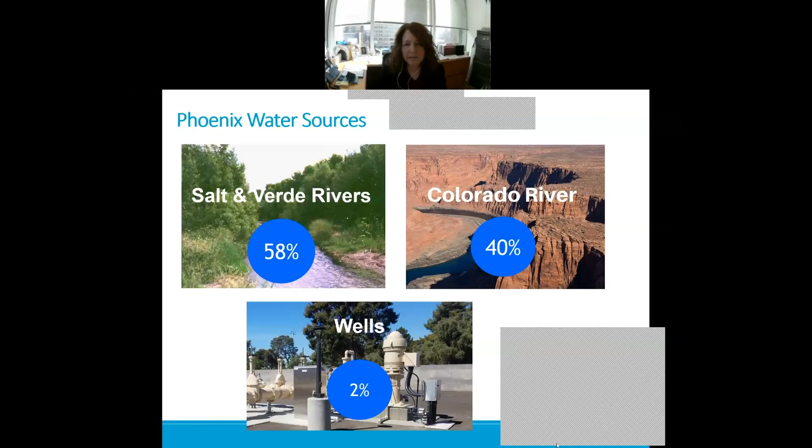I want to thank everyone for joining us today to hear about the Drought Pipeline Project. In order to understand the need for the project, I want to give you a little background on where Phoenix gets our water and how that water is moved to our customers. So as you can see on the slide, 98% of the water we deliver to our customers is surface water or from rivers, and only about 2% comes from groundwater pumped through wells.

So 58% is from the Salt and Verde River system, delivered to us through the Salt River Project Canal system at 3 of our water treatment plants. And then 40% is from the Colorado River system, delivered to us through the Central Arizona Project at 2 water treatment plants. Our dependency on surface water forces us to be constantly vigilant regarding climatic conditions and to be forward thinking about preparations for a hotter and drier future.

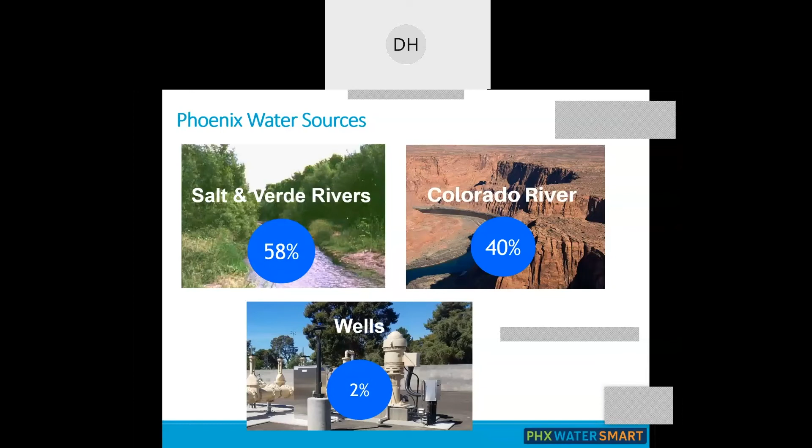Unfortunately, the Colorado River is over-allocated by approximately 1.2 million acre feet, which is roughly equal to 4 times the amount of water the entire city of Phoenix uses in a year. It's a large overallocation and a large problem. And to make matters worse, scientists tell us that the flows on the Colorado River may diminish as much as 25% in the future. Next slide.

So we are in a drought on the Colorado River system, and even though the watershed received snow this last winter, and we're seeing a little bit of snow now, we need many more winters like this one for water levels in Lakes Powell and Mead to recover.

And this is concerning because water levels in Lake Mead determine water allocation restrictions on the Colorado River system. So the Bureau of Reclamation, which runs the Colorado River system, sent their latest water level predictions recently based on current conditions. Their projections show that if we experience the same poor hydrology, rainfall and snowfall that we did in the early 2000s, Lake Mead water levels could fall below elevation 1025 by as early as 2024.

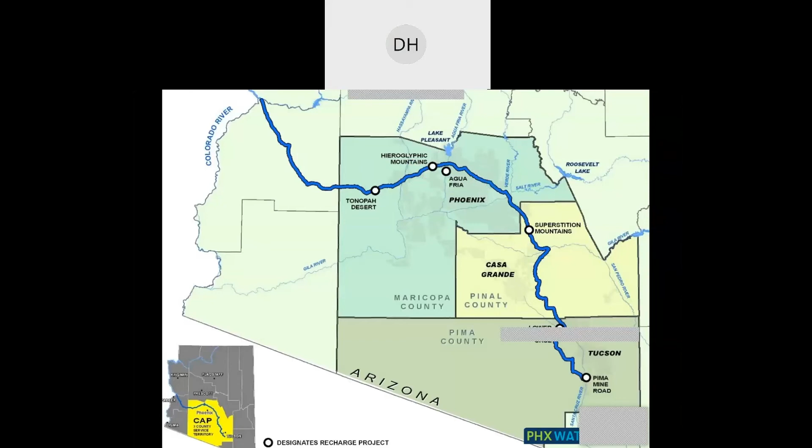Our ability to move water between the blue and green areas is very limited because of how our system was developed over time. We have supplies on the Salt and Verde rivers that are legally allowed to be used outside the boundary of SRP. And we have some surface water previously stored underground that we can use in case of restrictions on the Colorado River system. We also have native groundwater supplies available to use as a last resort.

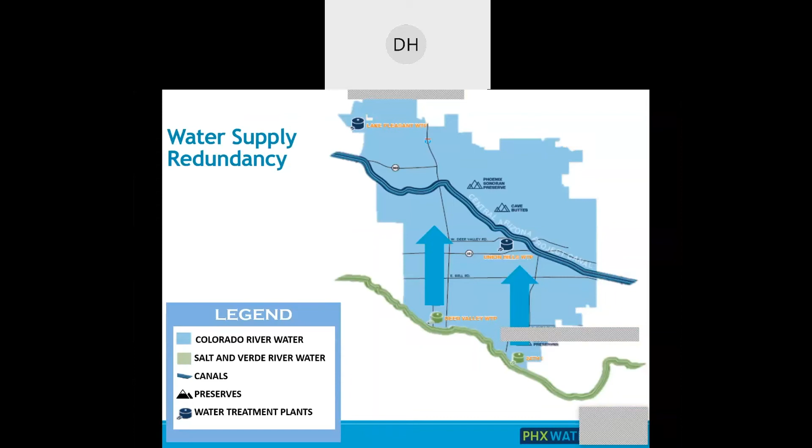So we have enough water supplies, but what we lack is the infrastructure to push the water where it needs to go during times of severe shortage on the Colorado River. With our existing distribution system, we can't push enough Salt and Verde supplies north to meet demand, and we cannot meet demands in North Phoenix on groundwater alone. This is because our water distribution system was designed and built to be dependent on a small number of large water sources coming from our 5 water treatment plants. Our pipeline is not designed to be dependent on a large number of small sources of water in the form of wells - it just doesn't work hydraulically.

So to reiterate, in order to serve our customers and build resiliency in our water system, Phoenix Water needs the infrastructure to move local water supplies north. These improvements are to provide water supply for our existing customers. As you can see through these pictures, this is basically all the areas you think of in North Phoenix right now to provide that water to our existing customers.

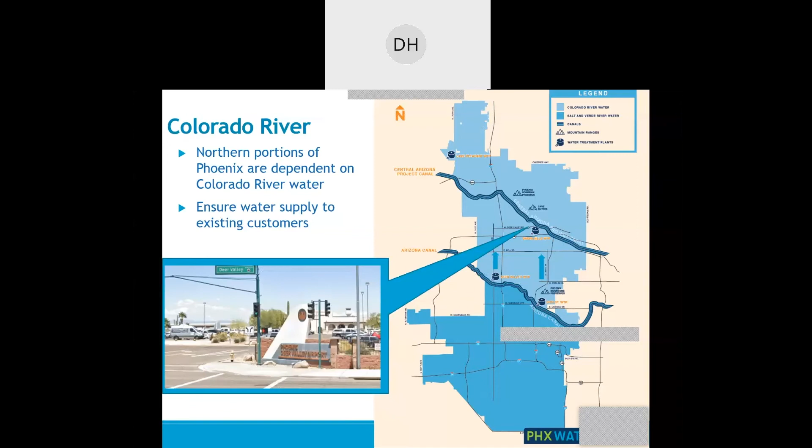And now I'll turn the presentation over to Clayton Freed, who will talk about the project in more detail. Thank you, Darlene. So the Drought Pipeline Program includes several projects to build new infrastructure to move water north and add overall resiliency to the Phoenix water system. This includes 12 miles of new pipeline to carry water between different parts of our system, as well as 4 new pump stations to push that water where it needs to go.

We're holding this meeting today specifically to discuss the projects mostly along the 32nd Street corridor, including a new pump station we're building at 31st Street just south of Bell Road, as well as the new 66-inch pipeline we're building through the Phoenix Mountains Preserve up to Bell Road and 32nd Street.

While we're on this slide, there was a question in the chat box confirming that the pipe from Glendale Avenue up to Bell Road is a new pipe. It will be a brand new 66-inch pipeline. As you can see on the map, there is an existing 48-inch pipeline also being replaced and rehabilitated, but this Drought Pipeline Project is mainly focused around the new 66-inch pipeline.

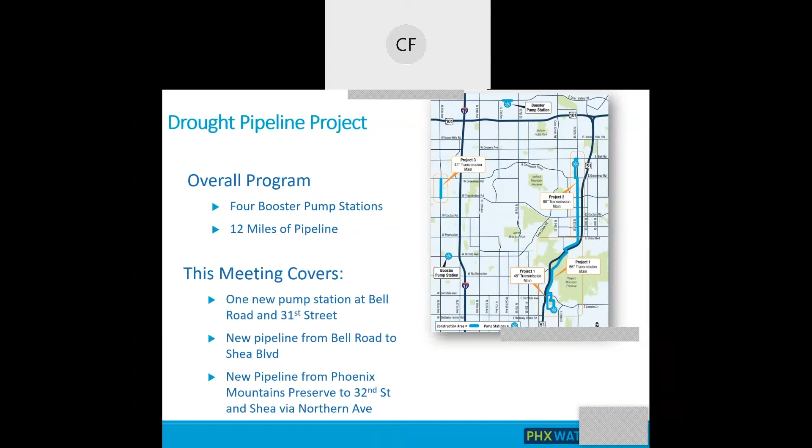If we could go to the next slide.

The new pump station I mentioned that's on 31st Street just south of Bell Road is shown in the image on the right. This pump station will be used to move water around in North Phoenix once the water is pumped up through the 66-inch pipeline. The image on the left is a 3D simulation based on our design of what this pump station will look like when complete. The entrance will be off 31st Street, and the pump station will include a perimeter block wall fence as well as new landscaping along the 31st Street frontage.

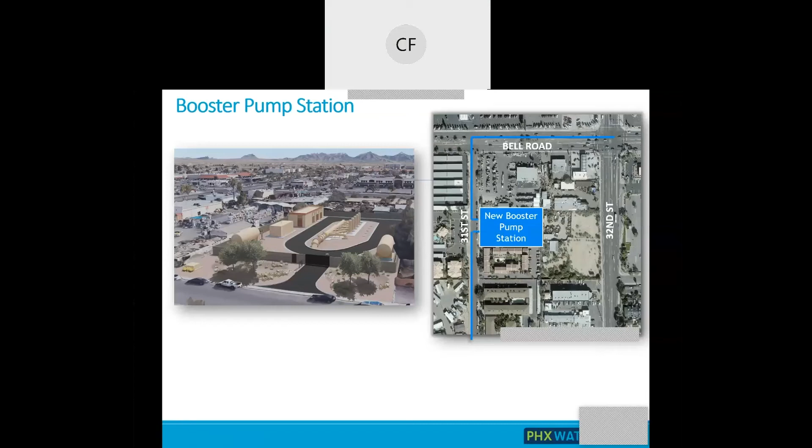These images help show the overall alignment of the 66-inch pipeline along the 32nd Street corridor. Looking from north to south, the pipeline will connect to our existing pipelines at 32nd Street and Bell Road, and will be installed along 31st Street between Bell Road and Greenway in order to connect to the new pump station on 31st Street. The pipeline will then go back to 32nd Street all the way from Greenway down to the south side of Shea. South of Shea, it will start to follow the Northern Avenue frontage road on the northwest side of SR 51 between 32nd Street and 26th Street.

Just east of 26th Street and Northern Avenue, we'll be boring a tunnel underneath SR 51 in order to connect with the 66-inch pipeline being installed through the Phoenix Mountains Preserve.

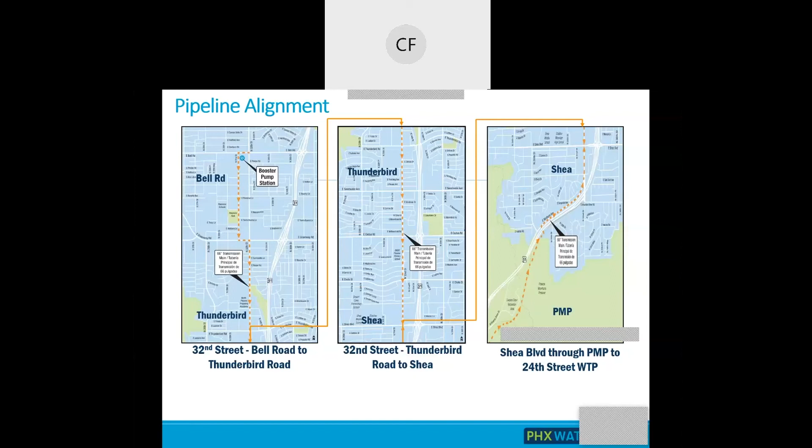It is typical for some utilities to have to be moved to make way for new pipelines being installed, and this is the case for the Drought Pipeline Project. Not only will the 66-inch pipeline be installed during the overall construction period, but other utilities will have construction activities in the area starting in the next few months and throughout the construction period, in order to move their facilities and make room for the 66-inch drought pipeline installation.

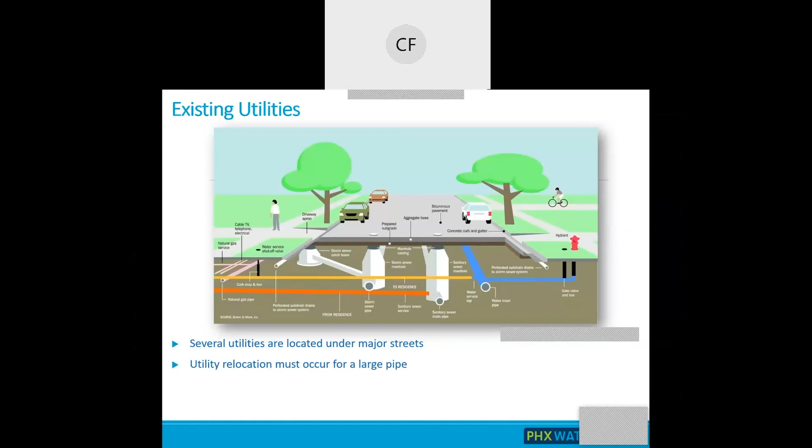It is a very complex process to take our large water mains out of service, because we have to ensure there's always water available to our customers. Oftentimes we do this during the winter months, starting around this time of year. So we will be installing the valve and connection to our existing pipeline at 32nd Street and Bell during a limited window when we can take that existing pipeline down.

Some of the construction at the 32nd Street and Bell intersection is actually going to start taking place soon, in November 2020 through January 2021, prior to the rest of the construction, which will start closer to April 2021, so we can make this critical connection to our existing pipeline during the winter months.

Multiple utility relocations will start taking place as well in various locations along the pipeline routes, and the 66-inch pipeline itself will start being installed in approximately April of 2021. It will be installed in multiple simultaneous construction headings in order to complete the pipeline installation by the end of '22, again in preparation for potential drought-related restrictions. The pipeline will generally be constructed from north to south, in those multiple headings.

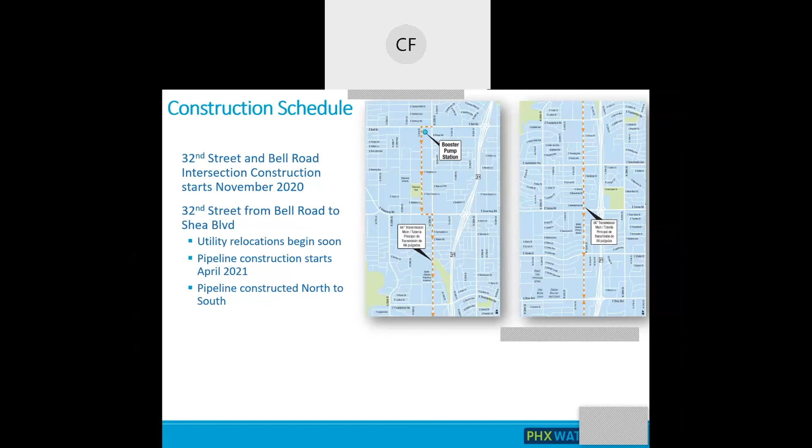So the pipeline work south of Shea and along the Northern Avenue frontage road will start around June 2021. Around the same time, the tunnel under SR 51 will start being installed. South of that, within the preserve, construction will start in spring 2021, as soon as March 21, and will follow mostly pre-disturbed areas, including the existing bike path in the Dreamy Draw area, which will be restored.

A new pedestrian path will be added at the end of construction, along with surface and landscape restoration. The work in the preserve will also take place at the same time as parks improvements to the Dreamy Draw recreation area, in order to minimize the overall duration of impacts to users of the recreation area.

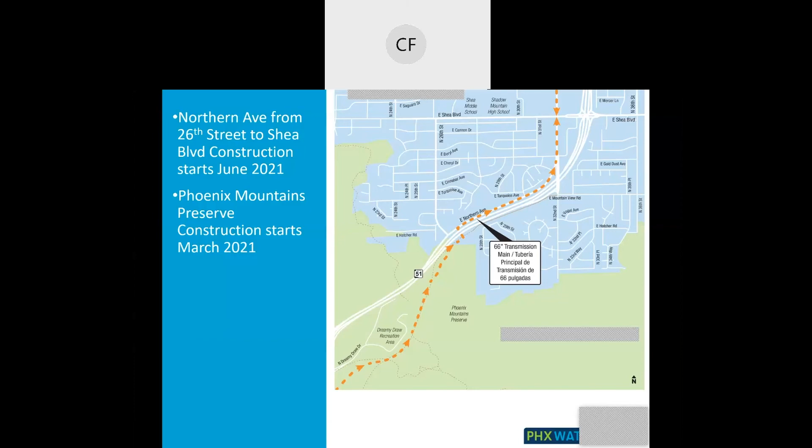So I will now turn the presentation over to Chris Ellison with Sundt Construction, who will talk about the construction activities and what to expect. Thank you. Thanks, Clayton. Like Clayton said, my name's Chris Ellison. I'm with Sundt Construction, and I'm here to inform you about the construction process and what you can expect. We've narrowed it down to 5 key items.

One is preparing the work zone. Next would be the excavation and installation of the pipe, followed by backfilling the pipe and then restoring the roadway.

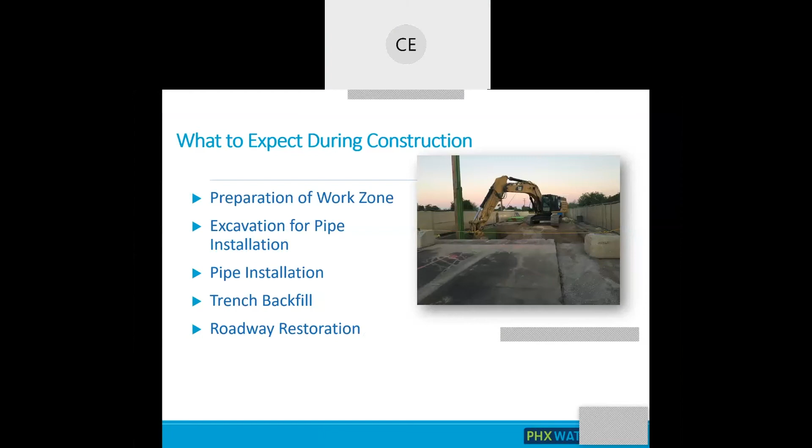To go a little deeper into each item, as far as work zone preparation, what that means is we're going to be getting traffic control set up. With the traffic control, we're going to make sure that we maintain pedestrian access. We're going to ensure that any bus stops that would be affected with the traffic control are temporarily closed and relocated, and that's communicated to the public.

We're going to start saw cutting the asphalt and removing it. Ultimately, we'll make sure that all the traffic control, before it goes up, is signed and messaged with variable message boards throughout the area that will be impacted.

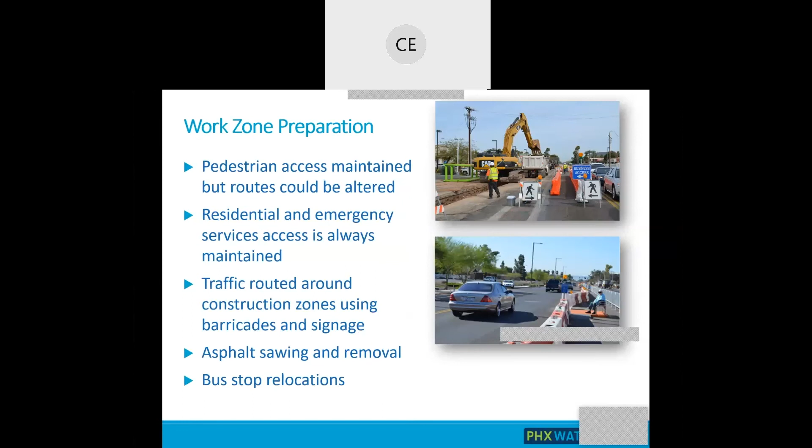Next slide, please. So once it comes to installing the pipe, it's rather large, like Clayton said, it's 66 inches or 5.5 feet, which means we're going to have a large excavation that'll be approximately 10 foot wide and on average about 20 foot deep. 10 foot wide is almost about the average lane width on 32nd Street, so we'll be taking up one lane with just our excavation. During the course of that, we'll be using different trench safety items such as trench boxes, slide rail, or speed shores to help protect our workers and the public.

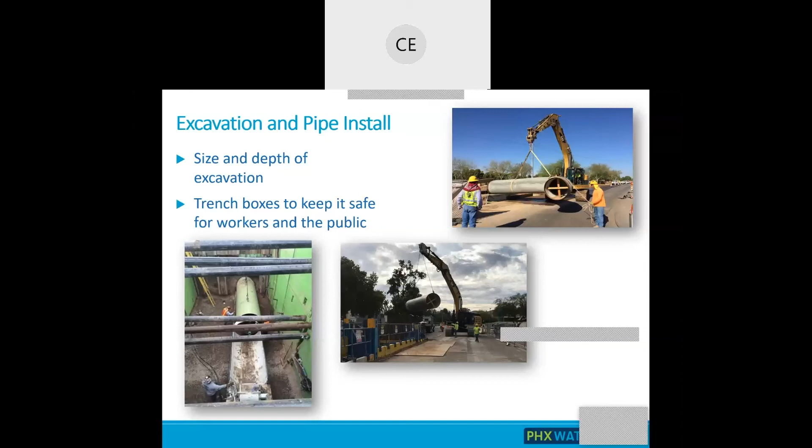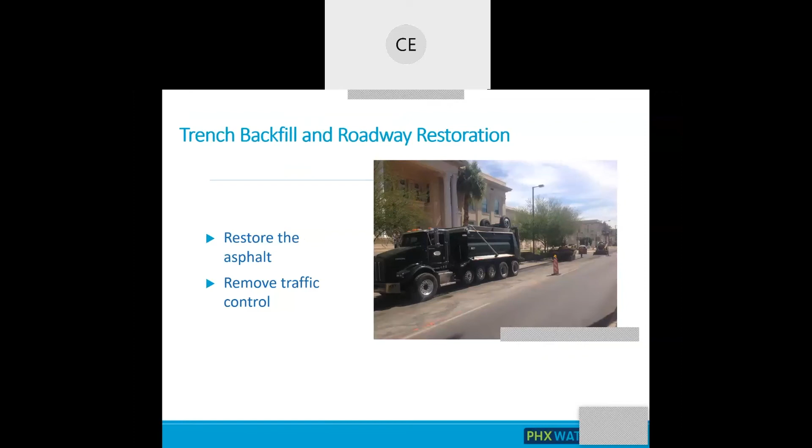Next slide, please. So once we get the pipe installed and tested, we'll be backfilling the pipe, and then ultimately restoring the roadway by paving it back and getting it cleaned up so that we can open it back up to traffic. Next slide, please.

So some things during construction, just so everyone's aware: we will be working during the city's approved hours. They do vary between the winter and summer months due to temperature and daylight hours. When we aren't working, we'll be making sure that all of our work zone is secured, so that vehicles and pedestrians are aware that there's a construction zone.

There will be the possibility that we'll be using personnel with flags to assist vehicles through active work areas when needed. Again, we'll be adding pre-warning information such as variable message boards and signing to let everyone know about the upcoming work zones. We will ensure that we maintain all ADA compliant pedestrian walkways and accessibility through the course of the project.

We will be using water trucks and street sweepers to mitigate any dust caused by the construction. We'll be communicating with fire, police, and emergency medical services so that they're aware of the traffic restrictions on 32nd and the major intersections as well, so that they know how to route and dispatch accordingly.

We will be temporarily relocating bus stops as needed. They will be signed and a temporary one will be set up with signage. There will be weekend work and night work throughout the project that will be communicated through our outreach efforts when those times are needed. Ultimately, there are a couple schools along the alignment and school access will be maintained. They will be a stakeholder that we communicate with often to ensure that they're aware so that they can let all of the students and parents know how to access the school.

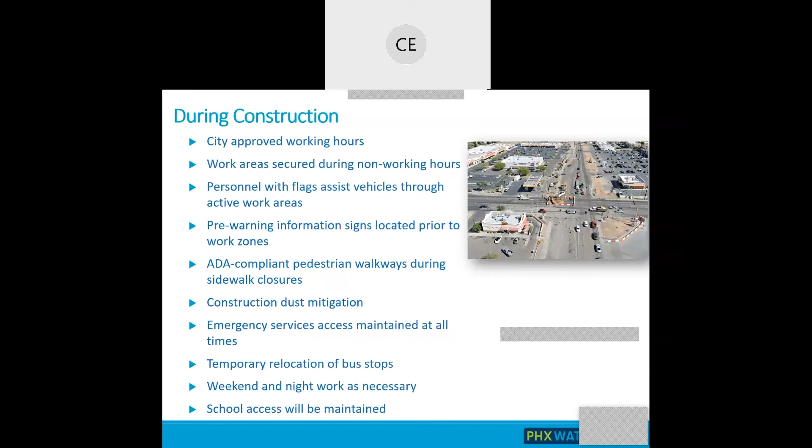Ultimately, it will be a construction zone. We will have people out there, and the speed limit will most likely be reduced. So please use caution when traveling through the work zone. It's not only for our craft professionals, but for the traveling public and pedestrians. We want to make sure that everyone goes home safe at the end of the day.

So you should have received a door hanger regarding this public meeting. You'll receive door hangers if there's a significant construction impact that we really need to notify the community in the area. You could also sign up for an email update, that's waterworks@phoenix.gov. We do send out regular emails weekly throughout the project to notify the community of closures and what to expect the following week. This will really be helpful for you if you would just like a weekly reminder of what to look for.